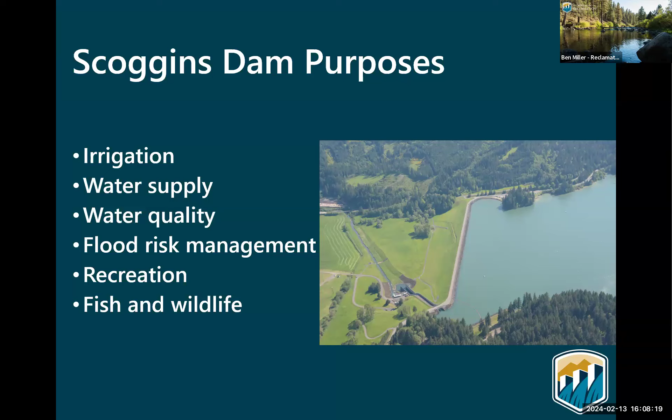Additionally, there is a water quality portion provided to Washington County, to Clean Water Services. In addition to all that, Reclamation's facility also provides flood risk management, recreation, and supports various fish and wildlife efforts. Next slide, please.

So Reclamation does own the facility. However, in an agreement in 1983 with Tualatin Valley Irrigation District, they do the operations and maintenance of Scoggins Valley Dam.

In addition to this, there's also many recreation activities around Hagg Lake, which is managed by Washington County Parks and Recreation. This includes nature trails, disc golf, and various water activities. Next slide, please.

So here are two images. One's a plan view of the design, as well as a picture of the facility, to give two perspectives of it. As you can see, there's a lot going on behind the water reservoir of the dam. The width of the dam is approximately a half mile in length.

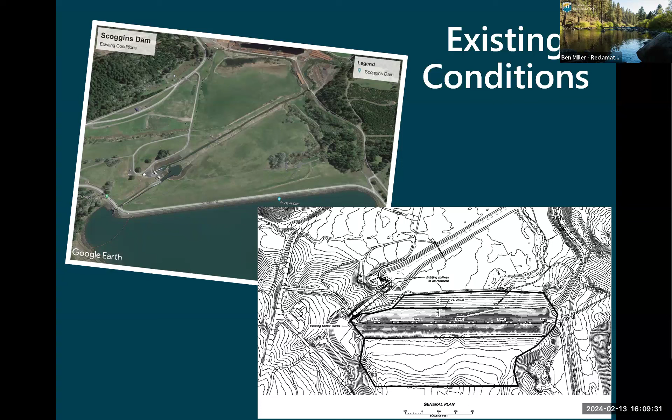Additional features include the spillway into Scoggins Creek and West Shore Drive, which crosses the dam, is a two-lane road with traffic barriers on either side. Next slide, please.

This white line is the approximate location of the outlet work piping, which supplies water from the reservoir into Scoggins Creek.

Additionally, there are facility buildings that help support the operations and maintenance of Scoggins Dam. This includes equipment storage, generator housing, and an outlet works building, all run by Tualatin Valley Irrigation District. Next slide, please.

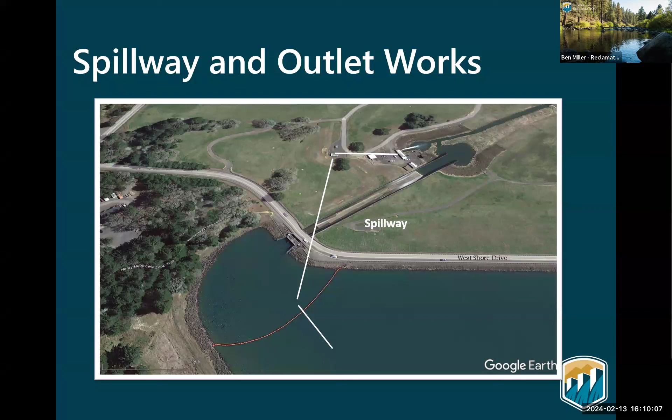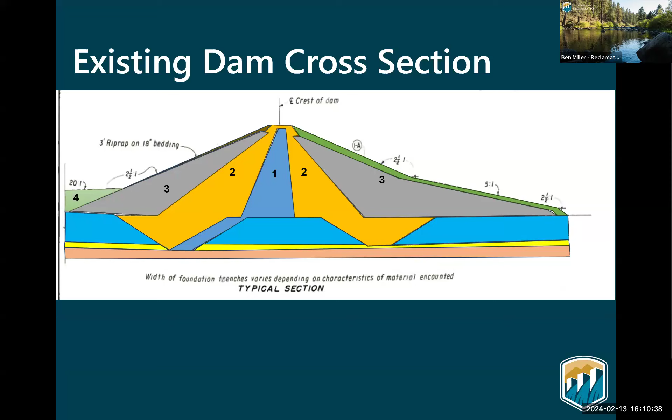Okay, I won't spend a whole lot of time on this slide, but really what I want to show is the earthen dam is not just composed of one type of earth that we just put together. There is some complex design that goes into what the dam looks like, how the earth is put in and how it's lifted up, and the type of material that's used. Next slide, please.

So some history on what's been happening. Reclamation began looking at risk to Scoggins Dam in the early 2000s. They identified potential risk at Gales Creek Fault as well as the Cascadia Subduction Zone. Starting in December of 2010, Reclamation began looking at how to mitigate seismic risk at Scoggins Dam.

5 alternatives were developed. In addition to this, Clean Water Services was investigating how to increase benefits, such as primarily increasing reservoir storage at Hagg Lake.

So in 2017, Reclamation and Clean Water Services came together in a partnership and started what was known as the Tualatin Joint Project, which looked at reducing seismic risk to the facility as well as increasing reservoir storage. From that, 3 project alternatives were developed. Next slide, please.

During that time, it was not quite clear how long it would take to come to a decision for the final project. So Reclamation began looking at interim risk reduction options. In 2021, a determination was made that none of the options were needed at that moment.

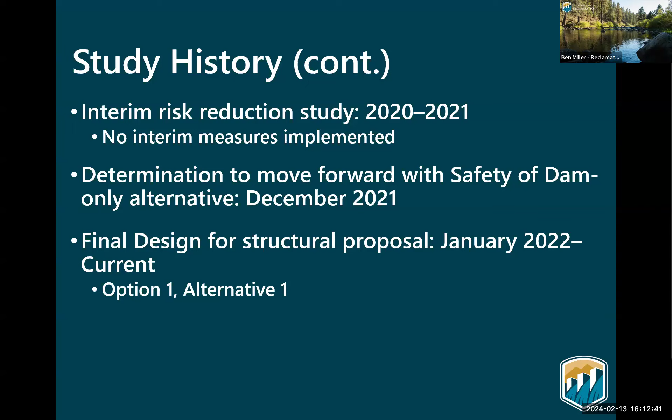And at the end of 2021, regarding the primary project, a decision was made to move forward with the safety of dams only alternative, so it reduces seismic risk but does not increase reservoir storage. Since that time, beginning in January 2022, Reclamation began moving forward with the current option for reducing seismic risk. Next slide, please.

So what is driving this? The primary seismic risk associated with Scoggins Dam is the Cascadia Subduction Zone. You can see the subduction zone runs from the Canada-Washington border down to Northern California. The closest point of Scoggins Dam to the subduction zone location is approximately 120 miles.

What's occurring is two plates coming together. The Juan de Fuca plate is going below the North American plate. When this event occurs, it's anticipated to have a 9.0 magnitude earthquake that will last for approximately 3 minutes.

So what could happen to Scoggins Dam in the event of this? A couple things that could lead to uncontrolled release of water, which is what Reclamation is trying to prevent. We like to control the release of water at the facility. So what could happen is an erosion of water through the dam or underneath the dam foundationally. Water could overtop the facility and come over the top. And finally, there could be a failure in the spillway.

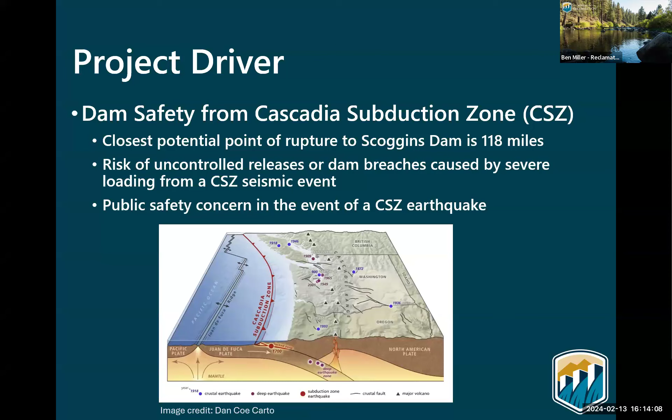So this gets down to why we're doing the project. The purpose of the project is to improve public safety by reducing risk associated with severe seismic loadings while continuing to meet authorized project purposes. Reduction of risk to the facility will be accomplished through stabilizing the facility, or bulking it up, in preparation for severe seismic loadings associated with a Cascadia Subduction Zone type of event.

So here is a snapshot overview of the project. We'll look at a few of these features in the next few slides.

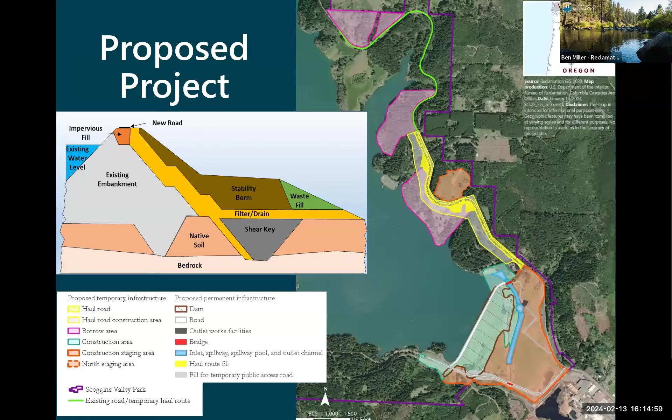So this lower part shows where the dam is, in the green with the brown hash - that will be the new footprint of the dam, essentially in the same location. The orange part between the dam and Stimson Mill is our staging and laydown area, where a predominant amount of the construction work will occur as well. The blue is going from the top near the reservoir on down, where it will be expanding the inlet channel, creating a new concrete spillway.

And then the part that looks kind of like a stop sign, that will be the new plunge pool at the bottom of the spillway. And then out from there is the new channel to Scoggins Creek.

In addition to this, the road across the dam is going to be closed. So in order to allow for access to the southern side of the reservoir, we are creating a temporary bypass road that will be open during the construction period. You can see this on the right-hand side of the staging area and the south part. That will be the temporary road that leads to the southern part of the reservoir.

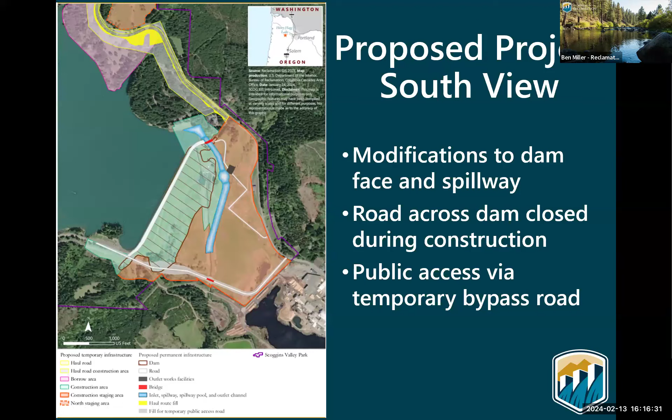In addition to this - next slide please. So this is a plan view of the reservoir. We'll have an updated slide that shows a newer concept for the spillway, but this is a concept for what we'll be doing for the embankment part of the dam. It's additional material that goes on top. And then in the orange, you can see that Scoggins Creek has been backfilled back to where the new spillway will meet with Scoggins Creek.

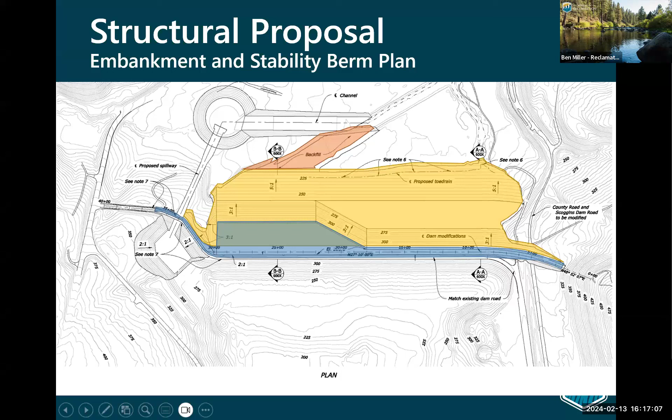The crest of the dam will be raised by 7 feet. In addition, the berm will be built back up with additional material - roughly 1.5 million cubic yards of additional material will be placed on the facility. Once the facility is built up, a new 2-lane road across the dam will be placed, which will be in compliance with current design standards by Washington County and the state of Oregon.

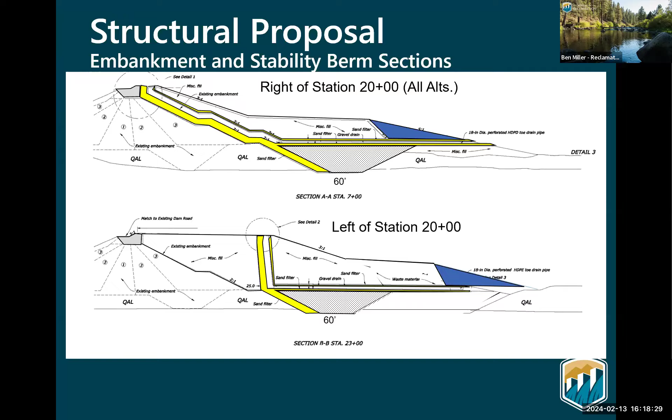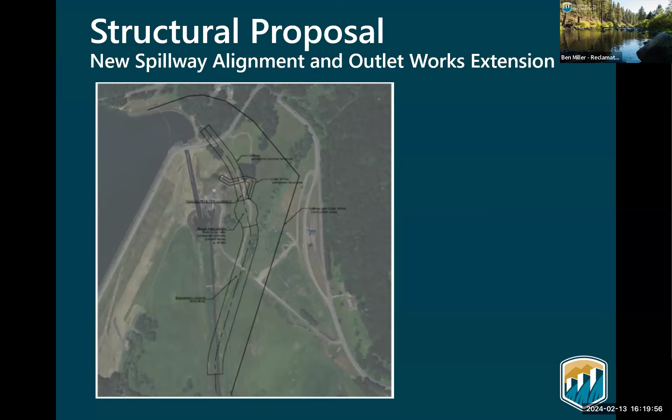So we mentioned the amount of material that's going to be needed for the dam, and where are we going to be getting that? We're looking at reclamation lands to be able to get this material. We did investigate previous borrow areas that were used, which are south of Scoggins Dam, but there was not enough usable soil in the area for what's needed for this project.

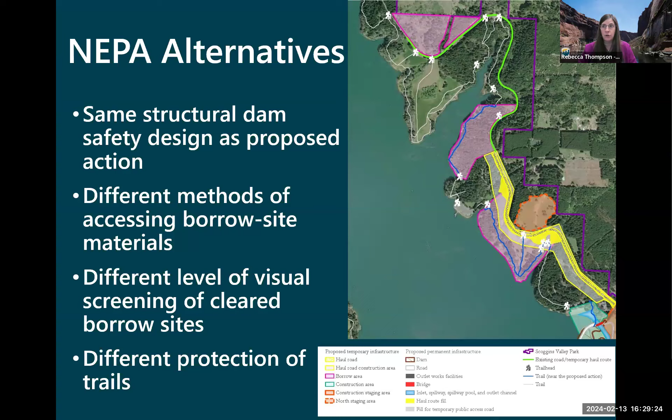We have 2 years that we are allowed to prepare an EIS. There's a requirement that the record of decision must be published 2 years from the date the notice of intent is published, which was January of 24. So no later than January 2026 will be the record of decision. Our designers are working on the project engineering design right now, scheduled for completion by 2027.

If the NEPA alternative that is chosen is one of the action alternatives, construction is anticipated to begin in spring of 2029 and would take approximately 6 years to be completed by 2035.